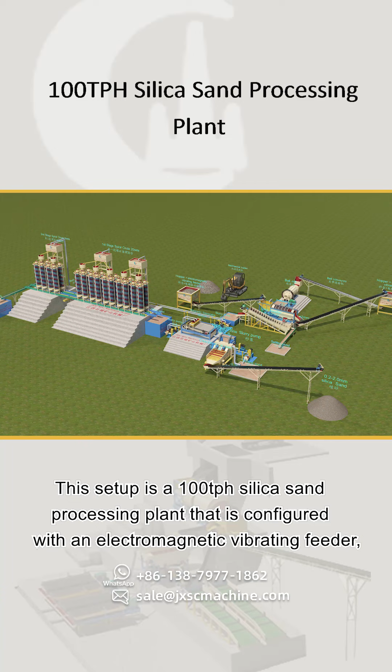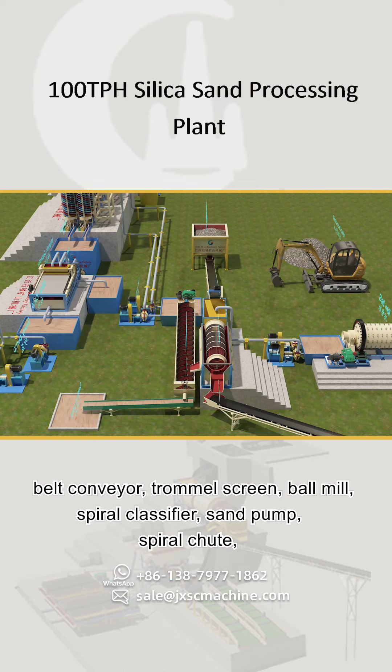This setup is a 100TPH silica sand processing plant that is configured with an electromagnetic vibrating feeder, belt conveyor, trommel screen, ball mill, spiral classifier, sand pump, spiral chute, plate magnetic separator, and fine sand recycling machine.

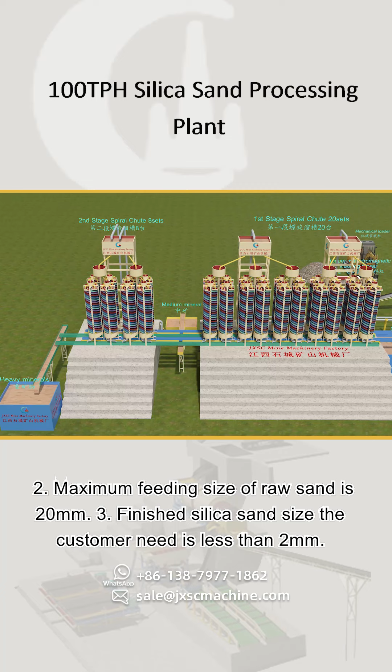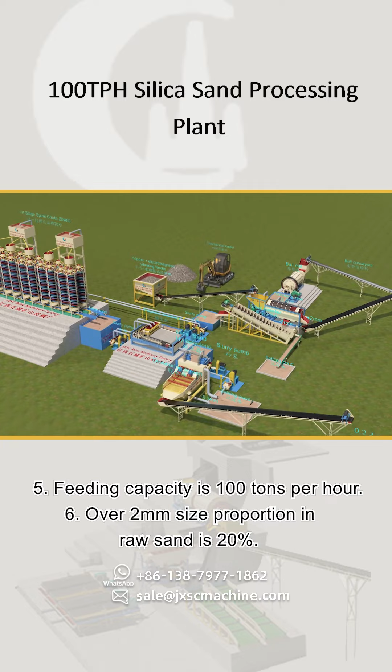Raw ore information in this silica sand project is as follows. 1. Raw sand contains 5% clay. 2. Maximum feeding size of raw sand is 20mm. 3. Finished silica sand size the customer needs is less than 2mm. 4. Raw sand contains 1% Fe2O3. Customer's requirement for removing Fe2O3 is less than 0.02%. 5. Feeding capacity is 100 tons per hour. 6. Over 2mm size proportion in raw sand is 20%.

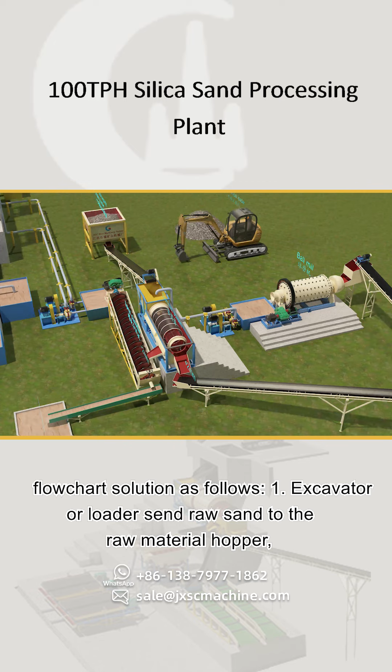According to this raw sand information, the JXSC engineer designed an efficient flowchart solution as follows. 1. Excavator or loader send raw sand to the raw material hopper, through electromagnetic vibrating feeder evenly feed sand to belt conveyor, then to a trommel screen.

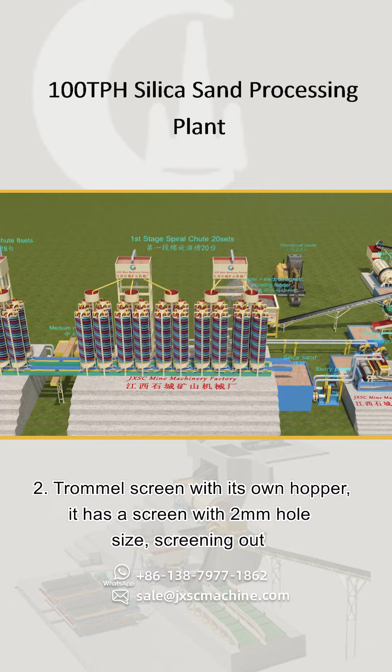2. Trommel screen with its own hopper. It has a screen with 2mm hole size, screening out over 2mm and less than 2mm.

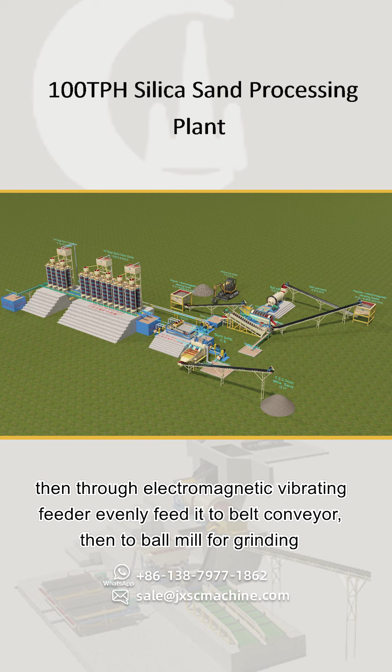3. Over 2mm of trommel screen go to one transit hopper via belt conveyor, then through electromagnetic vibrating feeder evenly feed it to belt conveyor, then to ball mill for grinding to 2mm below. The output of the ball mill is sent to the trommel screen hopper with a sand pump.

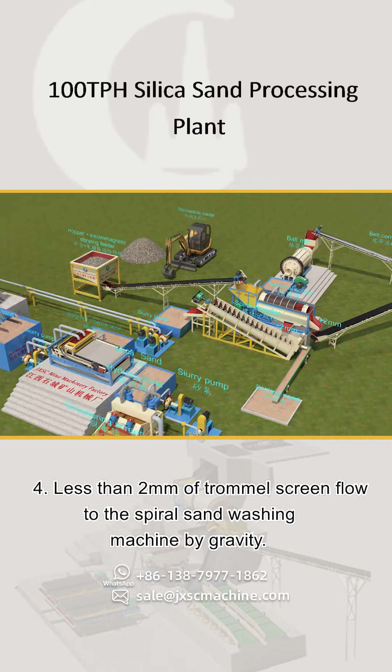4. Less than 2mm of trommel screen flow to the spiral sand washing machine by gravity. Spiral sand washing has the function of washing clay and removing mud water. The washed sand goes to one tank, and using a sand pump sends it to the first stage spiral chute.

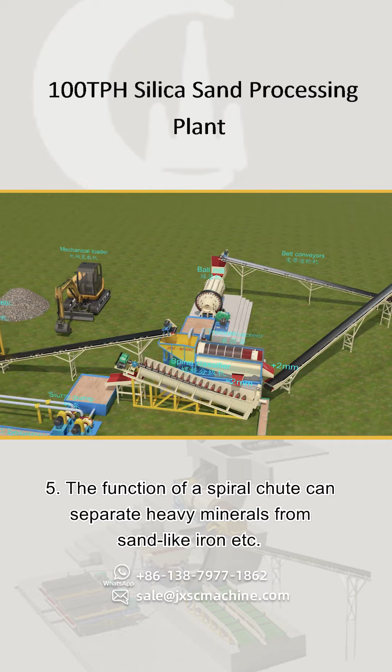5. The function of a spiral chute can separate heavy minerals from sand like iron etc. The spiral chute generates 3 outputs: concentrate, middling, and tailing. Middlings may still contain some silica sand.

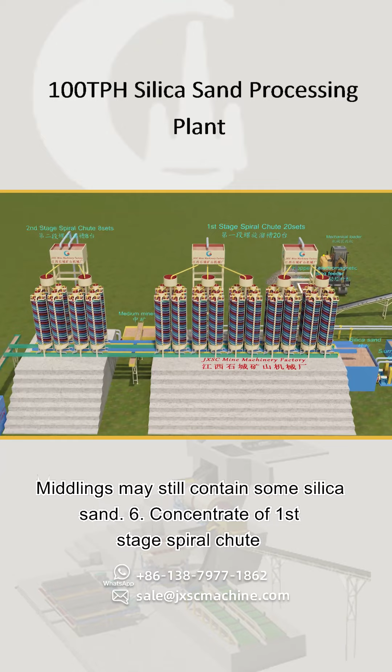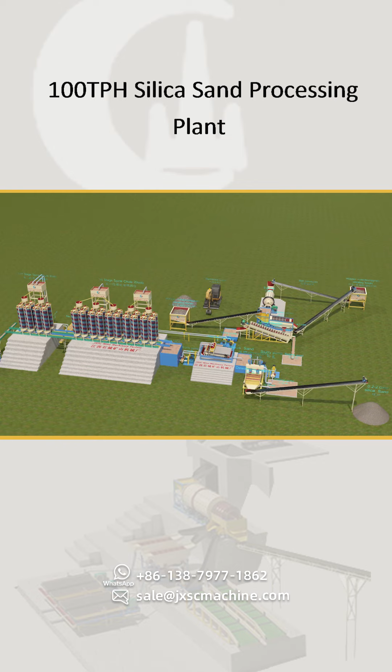6. Concentrate of first stage spiral chute go to concentrate tank, middlings goes to second stage spiral chute with sand pump for reprocessing. 7. All concentrations from 2 stages spiral chute are sent to plate magnetic separator with sand pump for further removing Fe2O3. At this step the iron content will be reduced to less than 0.02%.

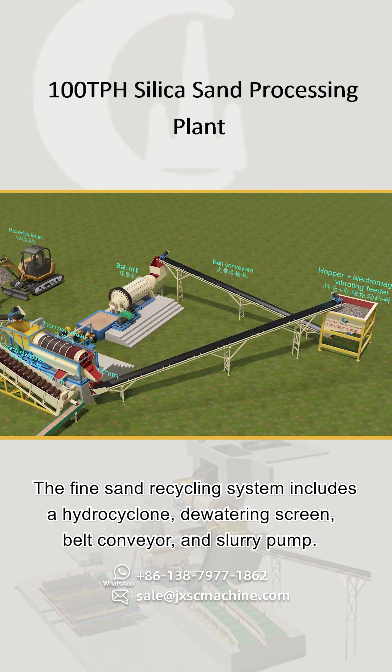8. The output of the plate magnetic separator is sent to a fine sand recycling system with a sand pump. The fine sand recycling system includes a hydrocyclone, dewatering screen, belt conveyor, and slurry pump. The function of the fine sand recycling system is recycling fine sand and dehydration and tailing water recycled use. The tailing water goes to the settling pond.

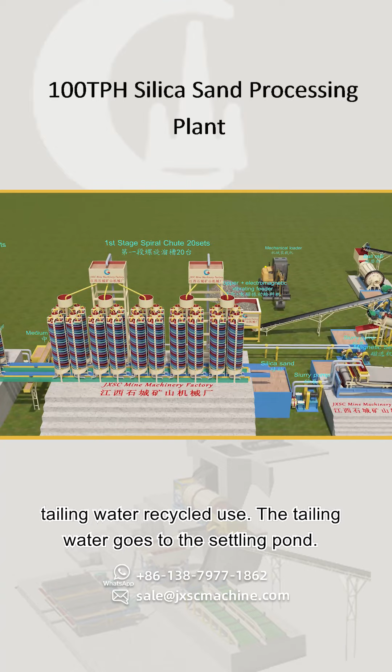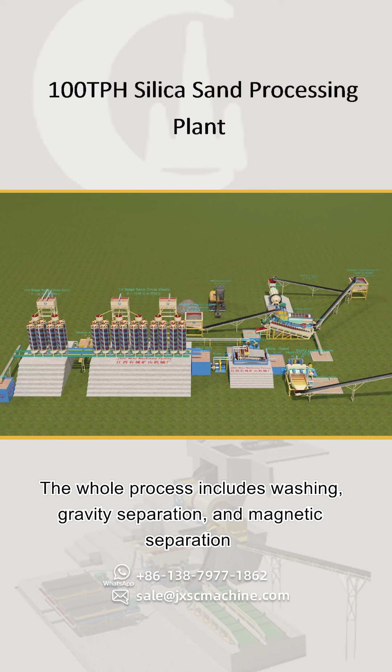9. Dewatered fine sand will be transported to stockpile by belt conveyor. This is finished silica sand. The whole process includes washing, gravity separation, and magnetic separation to make the finished silica sand clean and meet with customers' requirement for iron content.